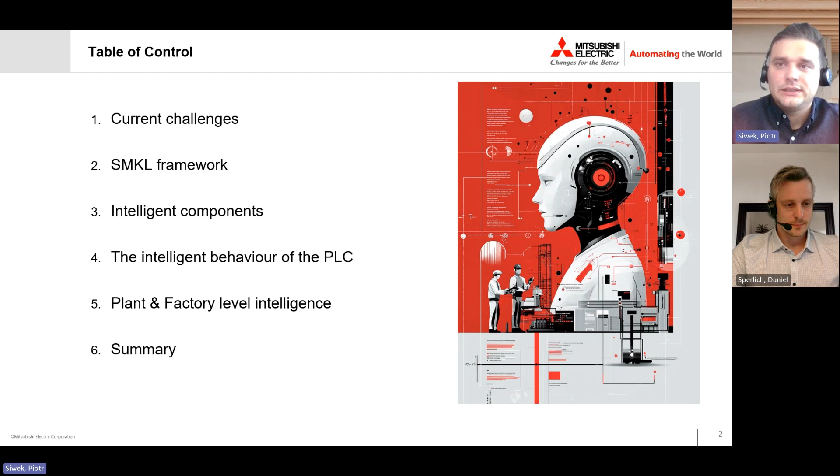So that is what we are going to talk about today. So very shortly about the current challenges, the ones that we will be talking about and trying to address. I think that one of the very important items is succession of skills, as we call it.

And the point is that due to the aging society, our staff, our skilled workers and engineers are getting older, and sometimes we don't have this quick and efficient way of replacing them. So we are left with a skill gap, and this skill gap is very difficult for companies to address.

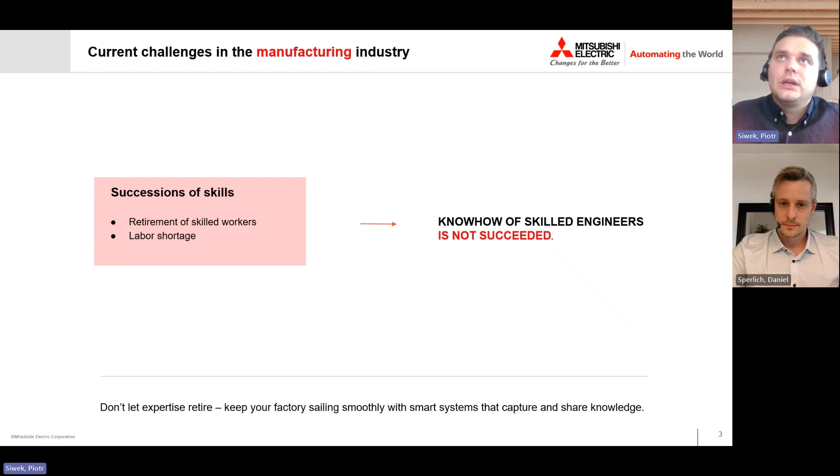Then obviously improvements of productivity and quality are always the issue. This is always the topic that is relevant for manufacturing companies, because we experience a lot of defects in our production. We expect quality problems, failure of equipment, and nothing can be done to avoid them completely.

But there are strategies to solve such issues, either ahead of time or very efficiently once they happen. And here we will also propose a couple of strategies.

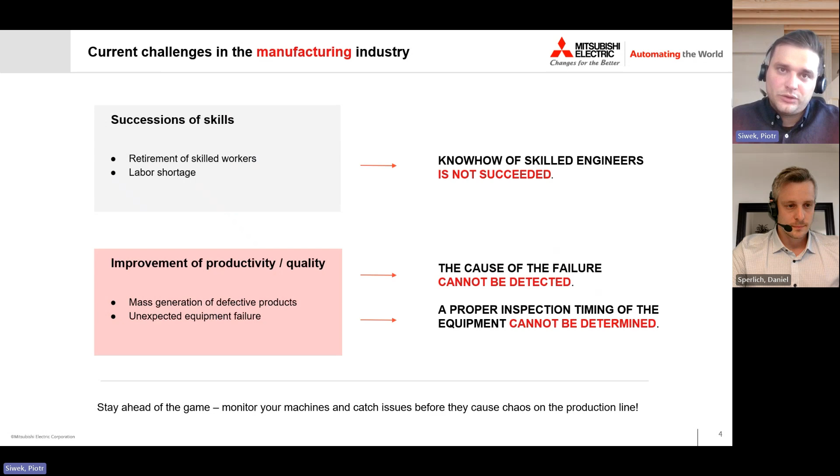And finally, responding to market changes. I think that the mass production that has become quite successful in recent decades is going away a little bit. These days we are talking more about high mix and low volume production, where people are expecting products to be personalized, and this affects manufacturing sites greatly.

Just to mention the new European Union directive, where all the caps on bottles have to stay fixed - it's a very small feature, let's say, but it created tremendous costs for production companies. So those things, unfortunately, create a situation where manufacturing companies are left with many problems.

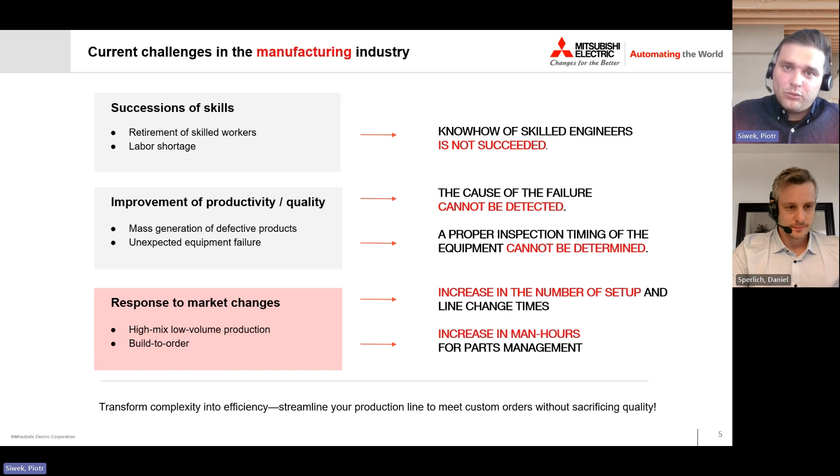A lot of them are very modern day problems, but they are affecting production sites greatly, so we will be talking about solving them. And I think to summarize this in one sentence, the idea is to improve by using data from the production site.

I think this is clear today, that productivity gains are shifting from the factory floor and the mechanics of the machines to the perfect use of data. And I think this is not surprising - this has become a main principle of Industry 4.0 already many years ago. But I believe this is still valid, that data is the new source of competitive advantage.

So we will be talking about this data, and we will be talking about using this data in many different ways - from analyzing how humans are moving and how they assemble equipment in more manual processes. We will be talking about how you can use data from the actual production, from the actual product. And also we will be talking about the assets - the machines, the type of data they are giving you, and what you can get from that.

And finally, all of this - we are not just getting the data, we need to analyze it and diagnose the problems. And we will show you the way, by intelligent systems, intelligent control systems that can help you do that easier than it was possible before.

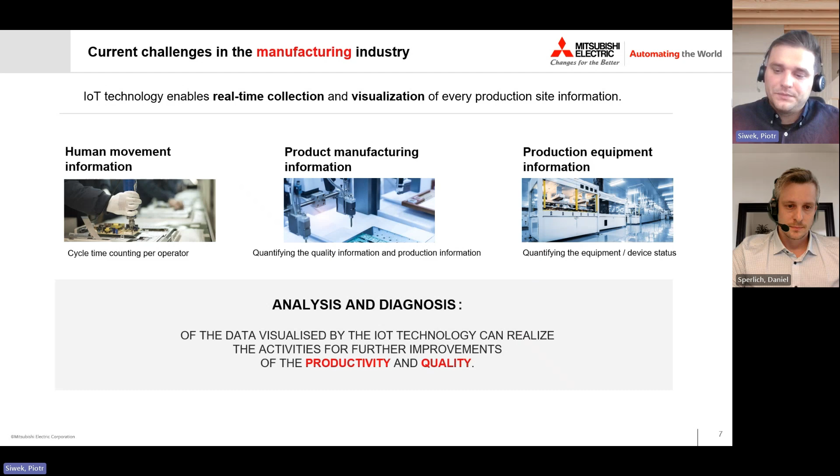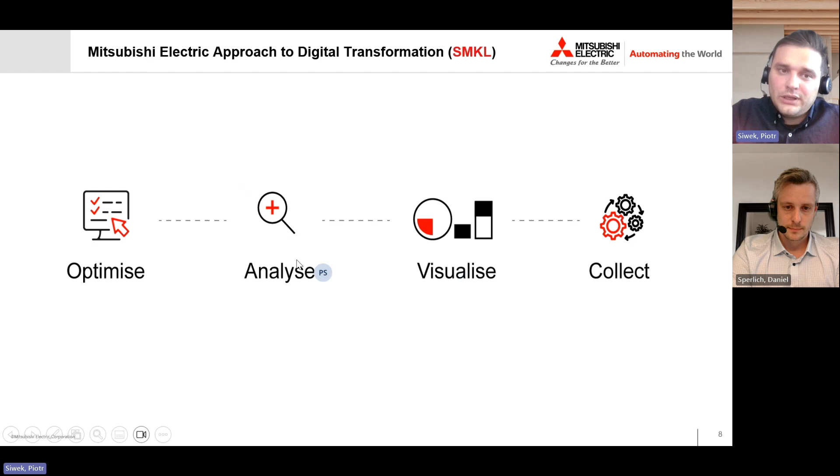So I mentioned about the framework, and the framework itself, SMKL, is quite simple because it gives you the idea how to use the data and how to classify where you are in your data utilization. So generally, it goes from collecting through visualization to analysis of the data up to the optimization of the production process, for example. So this is essentially the idea.

And the SMKL is like this matrix where you have just two axes, and basically every problem in your company, every problem of a manufacturing site, you can position it somewhere on how advanced you are in using the data, and how advanced you are in specifying the size of the sample, let's say.

So are we talking about single machines that you are able to monitor, or are we talking about the whole factory floor? This depends on your management level, we call it, but obviously it doesn't matter where you are, because you can always move a little bit forward, and it is very important to understand the current position. This SMKL is the tool to help you make sure where you are and move forward from it.

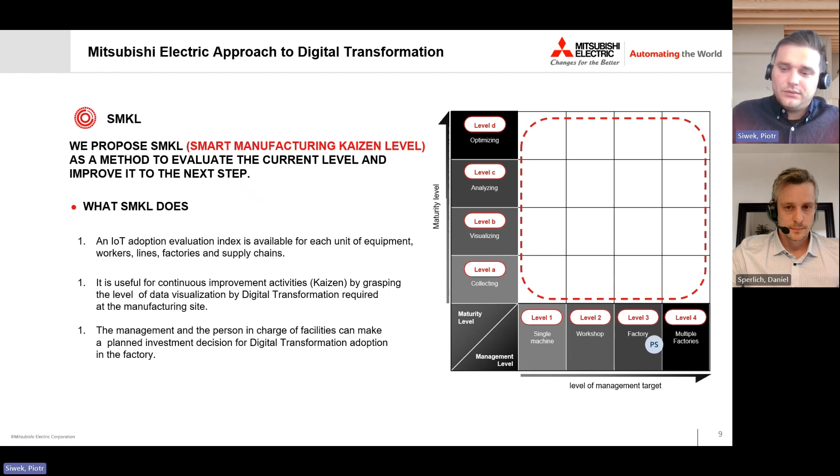And we will show you ways of moving forward from virtually any level, so it doesn't matter where you are. You're using the strategies that we'll present to move to a more advanced position. And finally, the principle we want to make today is that the intelligent control system, however it sounds, is not the same as a programmable logic controller. The PLCs are a part of the whole equation, but this is not the same.

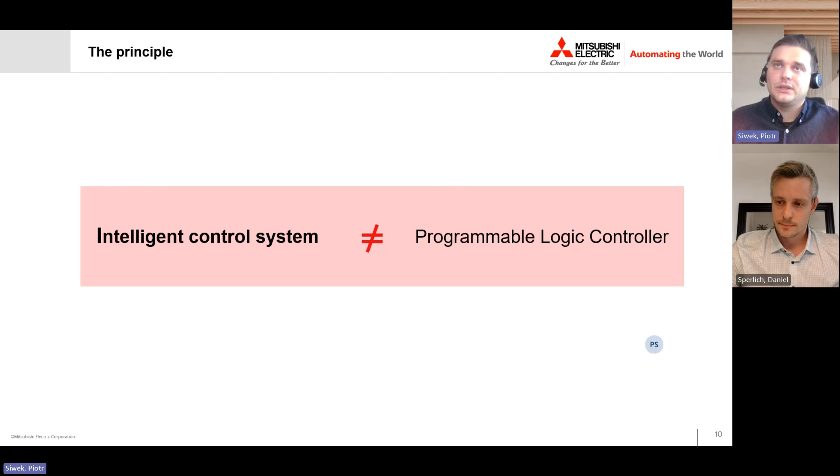And we will be showing you also the data utilization strategies that are not necessarily used with the PLC itself. So we spoke about those different levels, different strategies depending on how advanced you are or can be in using the data. So you have this simple view of the factory, where it can start from the component level up to the cloud when it comes to using the data. And we will start with the first level, going through each stage up to the whole plant that you can also analyze. So Daniel, would you take over?

Yes, thank you very much, Piotr, and thank you also for joining. As Piotr said as well, if you look at this picture, you can see all sorts of levels, but you don't have to start right away at a very advanced level. Many times it's already good to have a very quick result and ROI if you start very small and then grow in steps.

And that's why Mitsubishi Electric also has lots of solutions in each component that we already have. I would like to introduce here on the next few slides a few solutions that we have in our servo systems, in our inverters, in our robots that make your life already easier. They're basically already integrated, so nothing more that you have to get. And the topics that we address are very specific to each product, to the tasks they have to do, or typical tasks, let's say. So there's maintenance, predictive maintenance, or also improving product quality or takt time reduction.

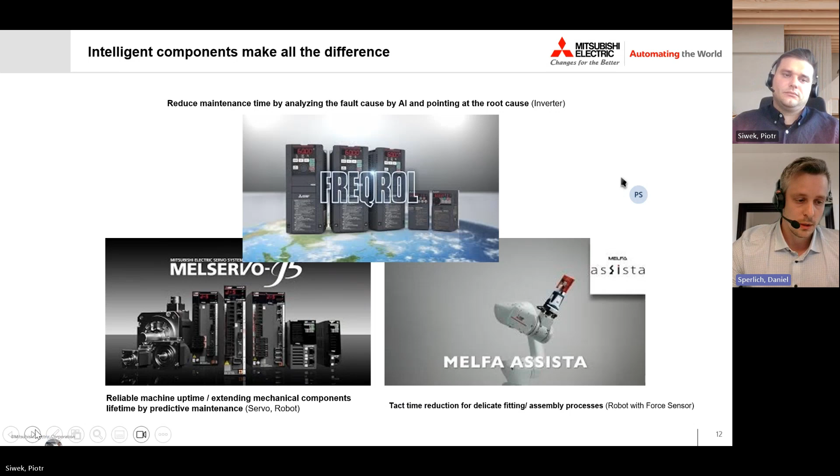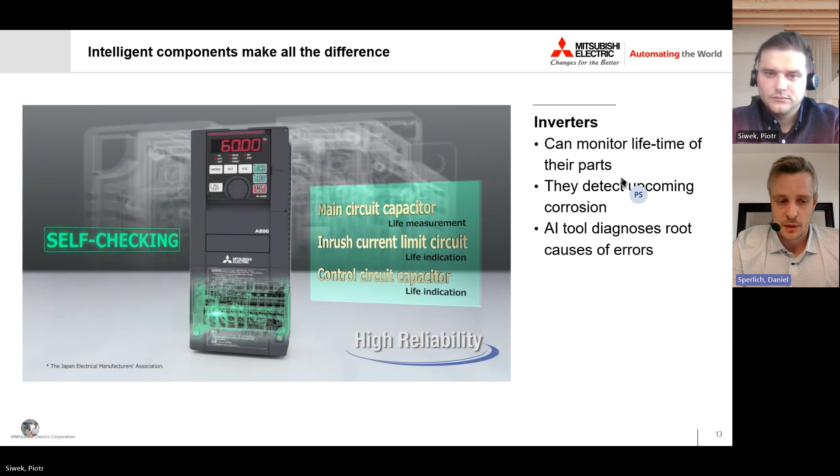And I would like to go through them one by one, starting with the inverter. Over here, you can see that our inverters already know all the details about the internal components, from capacitors, circuits, or even there's a new corrosion detection inside that will indicate if you are in a harsh environment, when the PCB is close to failure, that you should replace the inverter or the internal components. So really cool integrated functions already.

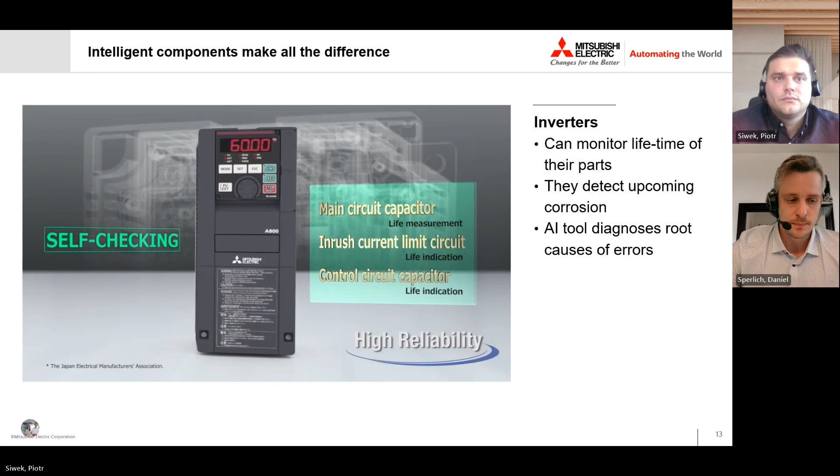And of course, there's AI in almost all of our components already inside. So the AI that is specific for this inverter is identifying the cause of the error. Every inverter has some errors, maybe for example some overload or other troubles, and the AI is internally detecting what happened before, what happened after the error, and pinpointing the cause that resulted in that error. So it's saving you lots of time for troubleshooting so that you can get your machine back and running very quickly. That is a very small and quick example of the inverters.

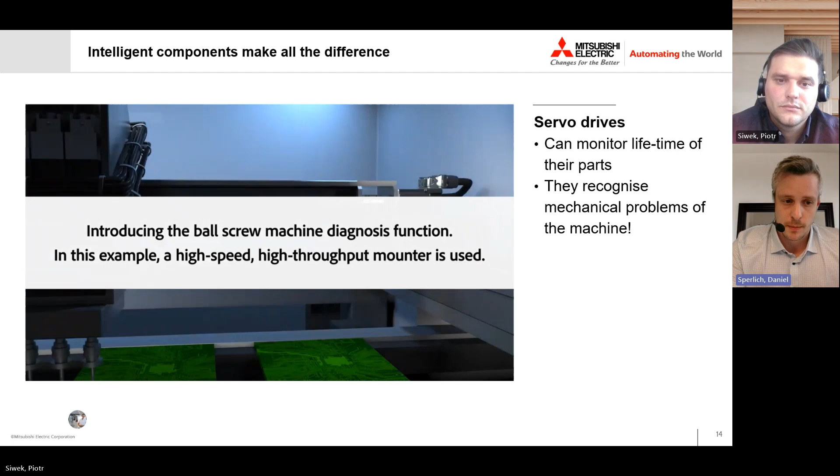If we look at the servo drives, here it is a little bit more focused on the mechanics. Typically, servo drives are connected to belts, gears, ball screws. And by learning the behavior of the mechanics, the AI can then detect what is the good situation, what is the good production cycle, and when does it slowly and gradually shift into a maintenance or breakdown scenario?

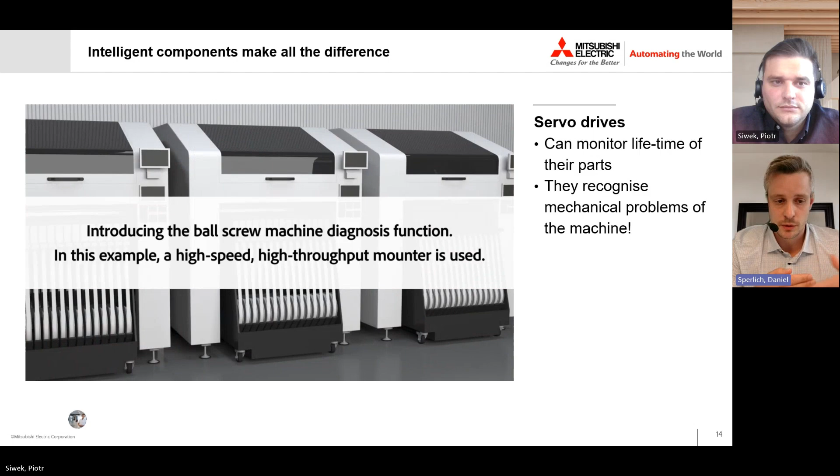So what does it mean? For example, if the ball screw is not properly maintained, maybe there's some oil missing or whatnot, slowly over time there could be some vibrations happening. There could be increased torque because it's harder and harder to move the ball screw. All that can indicate a breakdown in the future, so we can warn you ahead of time.

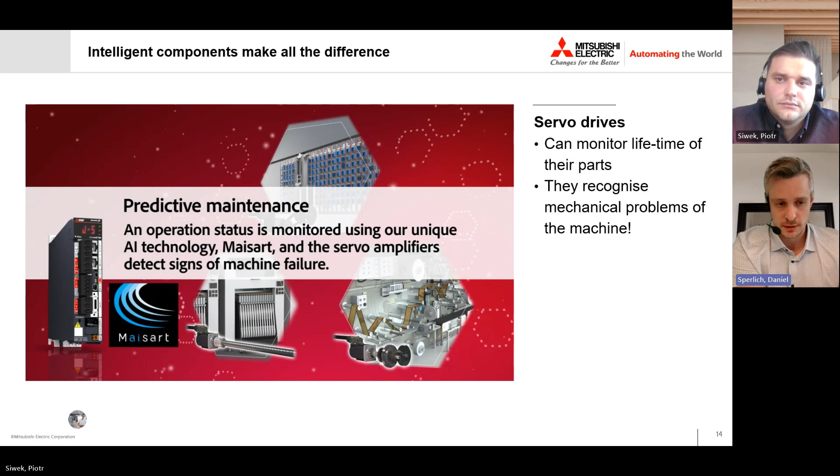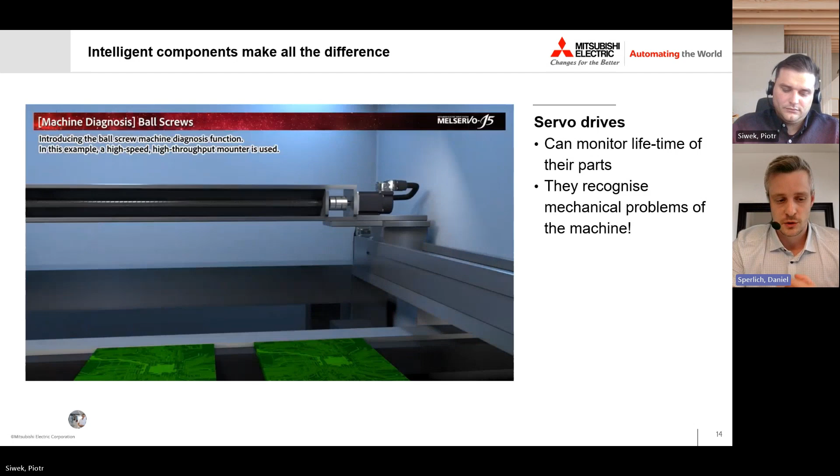And exactly the same thing you can also expect for belts, for example with the belt tension - there is AI technology also for that - and for gearing when the backlash is increasing. So at the end, you will have a very sophisticated predictive maintenance functionality already in the servo system that comes right with it. You just have to activate it, teach basically the normal situation of your machine after you maintain it, and from there on you get automatically the warning from the servo system that there's maintenance having to be done very soon.

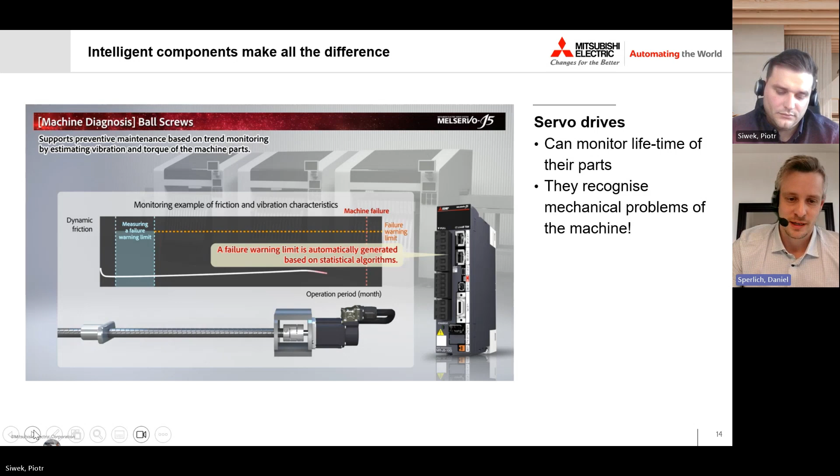It's a really cool function here, and I think you cannot be any closer to the mechanics than the servo system over there. And the last part that I want to introduce are the intelligent robots.

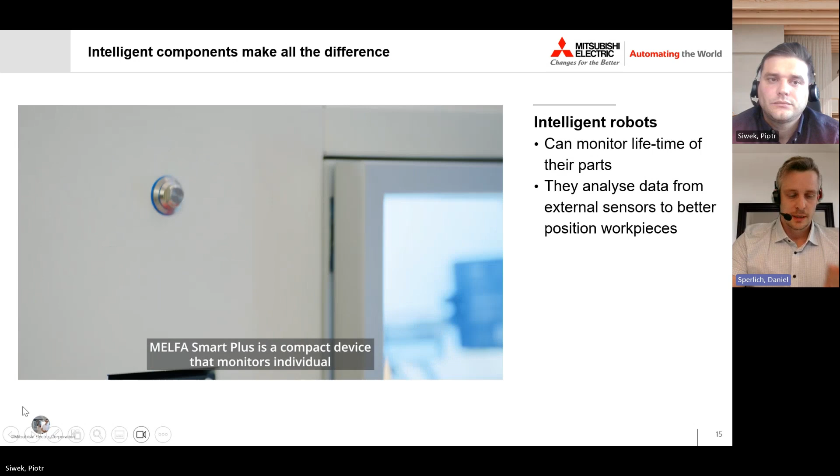So you can attach a Smart Plus card that allows you then also to utilize additional features. Just imagine the robot is nothing else but a hand, but with a hand, if you imagine this kid's toy where you have many different shaped holes, and the kid is trying to put the circle into the circle - it's not putting it exactly in, but wiggles around a little bit and then fits it. Roughly the same you can expect then also from the AI, from the Smart Plus card.

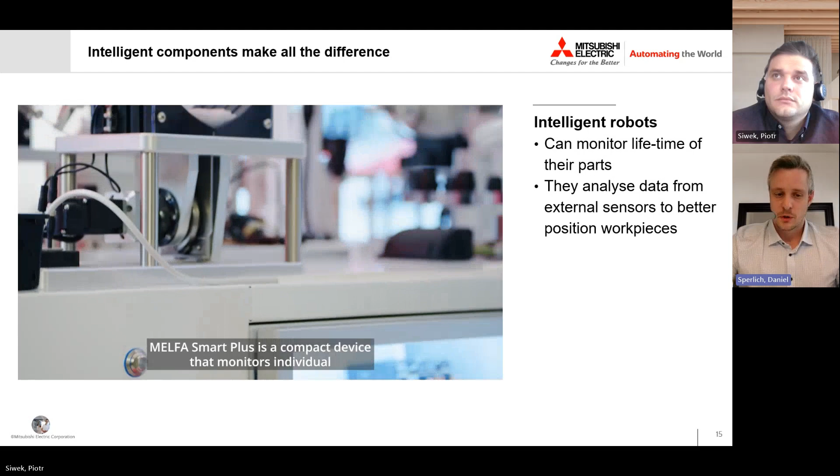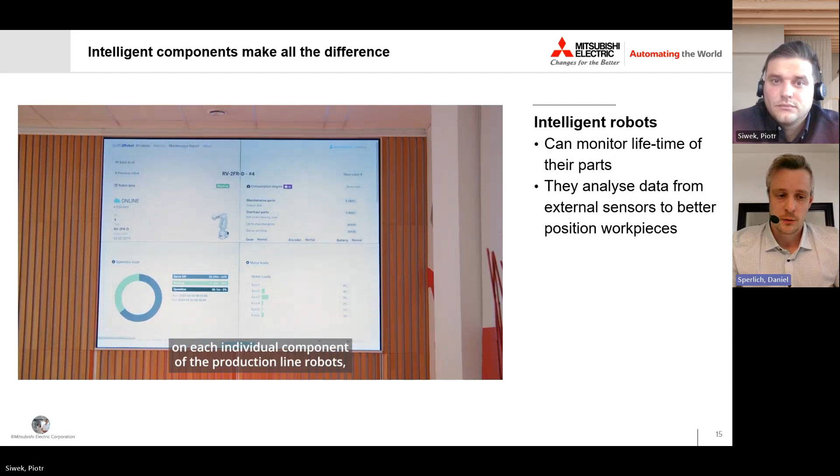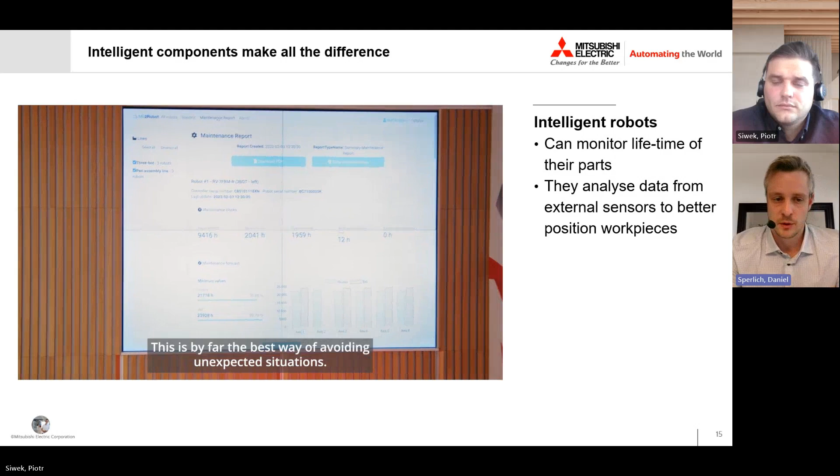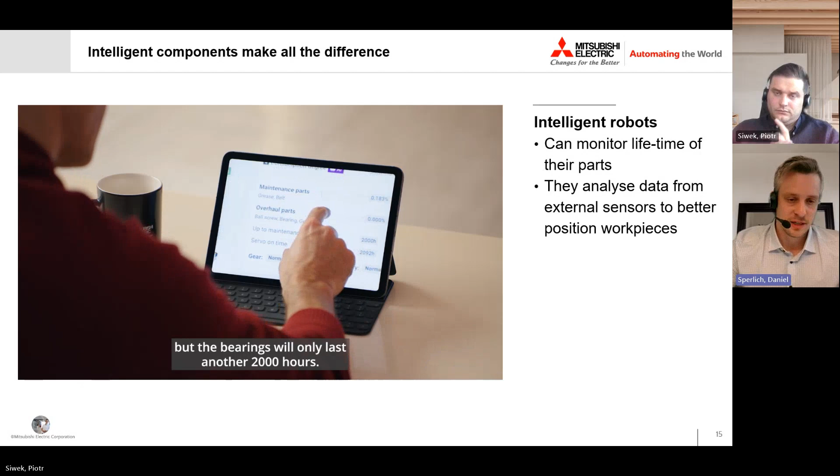So even if there are some tolerances, or it's very hard - not fragile, but difficult - to fit some product inside, you can do it without breaking it, because now the robot can feel, literally. And of course all the internal components you have there as well - maybe belts, tensions, gears, and so on - are observed all the time, and you can get automated warnings for maintenance. So already, as I said before, 3 cool solutions with AI inside that you can start already from the component level, meaning virtually no extra investment and quick ROI.

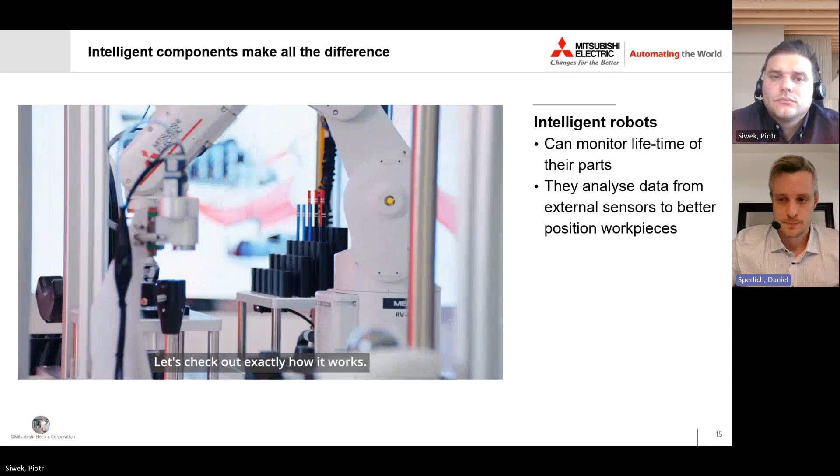Going from the component level to the machine level, getting basically one step ahead. Here I always have to smile a little bit - everybody who knows Back to the Future with Doc Brown, traveling back in time in the first version of Back to the Future - that's exactly also what helps you when there's some trouble with your machine.

Just imagine this - I will show it in a video later, but let me explain a little bit. If you have trouble with your quality or your machine is stopped, you always come to the machine after it already happened, so you're sometimes guessing a lot, like what happened. You have to reproduce the error and so on. So the idea of the system recorder here is that you can travel back in time, see exactly what happened, and take countermeasures accordingly, which then, if you eliminate the cause - for example for a product quality drop or a machine breakdown...

...in the future your machine has a better OEE, your quality is better, and overall there's improvement of your machine.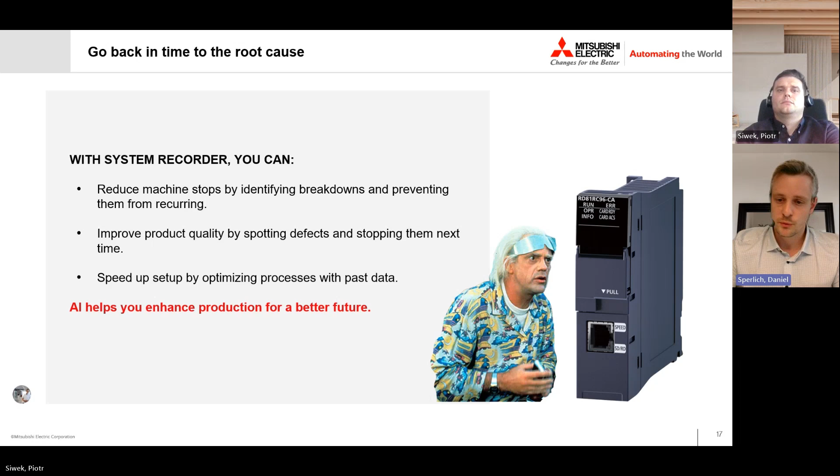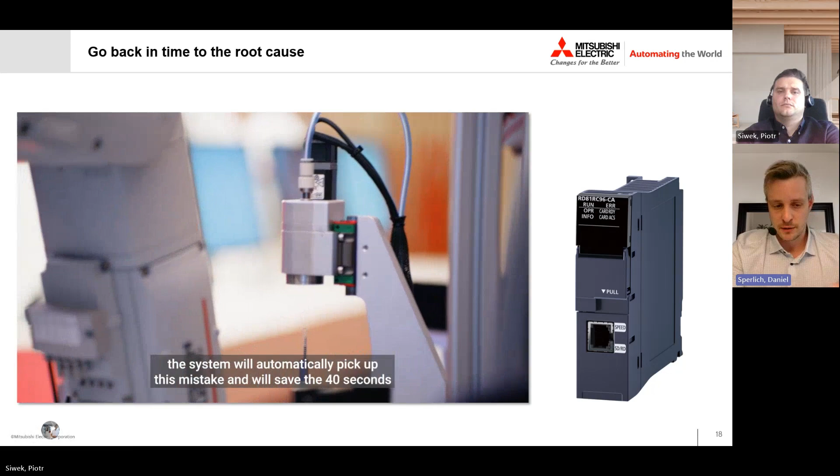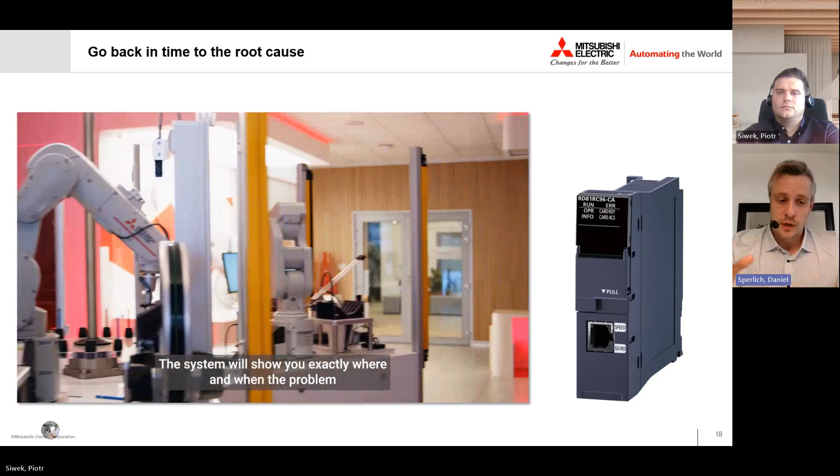So this is actually a very nice example over here, where you can see that during the assembly of a pen, the cap was not correctly mounted on it, or not correctly screwed, and there was some error basically. It was all captured by camera - this is what I didn't mention before. Of course, with a camera image as well, or video image, if you go back in time you have a view of the situation that happened, but you also have all the data that supports it, and everything is synchronized.

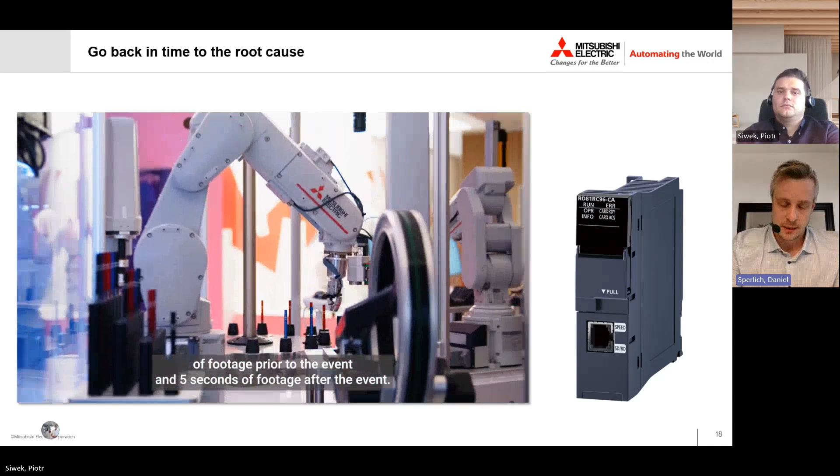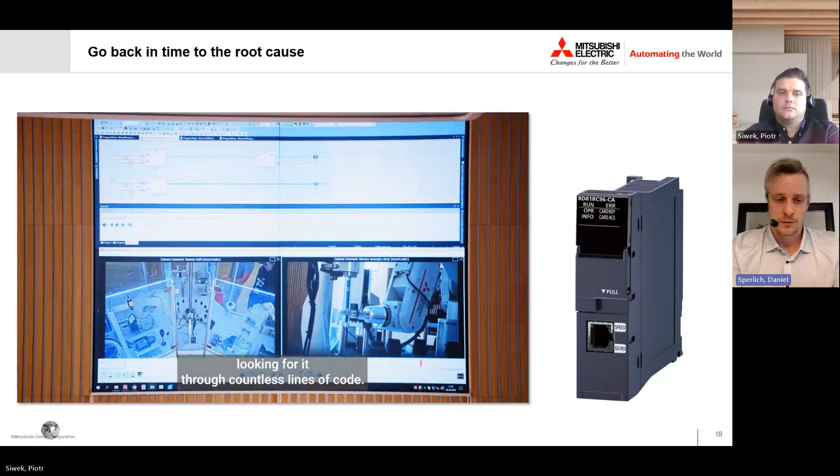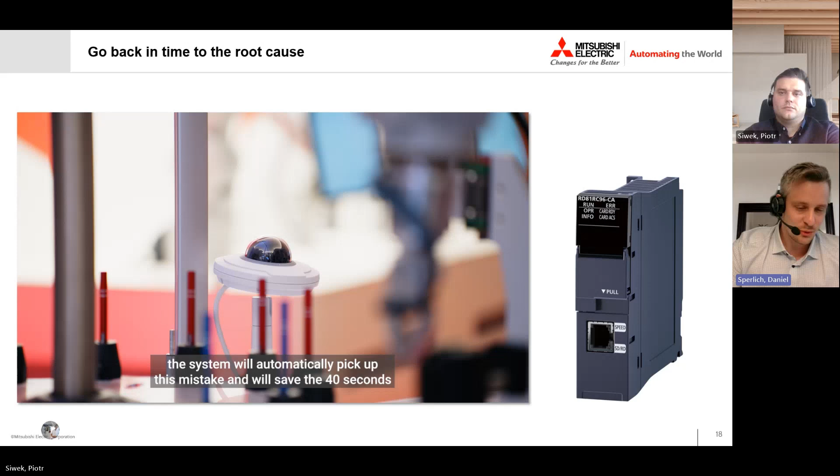So even if you arrive at the machine after it stopped, you can go back and you have exactly the same tools as if you were standing in front of the machine exactly at the point in time where it happened. You could see it very briefly on the monitor at the right side - the moment it jiggled and the cap fell off. It was very short, but I think this is a really cool functionality of the system recorder.

But okay, so this was about going back in time, but I think also maybe going again to this movie topic. There's also Back to the Future, right? So also you want to go in the future, trying to avoid what could happen or what will eventually happen if you don't do anything in the future.

And I took this small example here from Formula One, because this is actually also an example where this solution that I introduce here is being used. So you can imagine in a Formula One car, there's so many sensors, and the sensor data is transferred all the time to the control desk. And probably if you're watching Formula One, sometimes you hear that the crew from some team says, please stop the car, because they saw something was wrong with the engine and they didn't want the engine to blow up.

Okay, so at the end, what the solution does is it creates a possibility to make correlations of all your production data. So you can see here on the left side, you have item B and item A. This could be temperature, pressure, for example. And the correlation of both is then displayed over here.

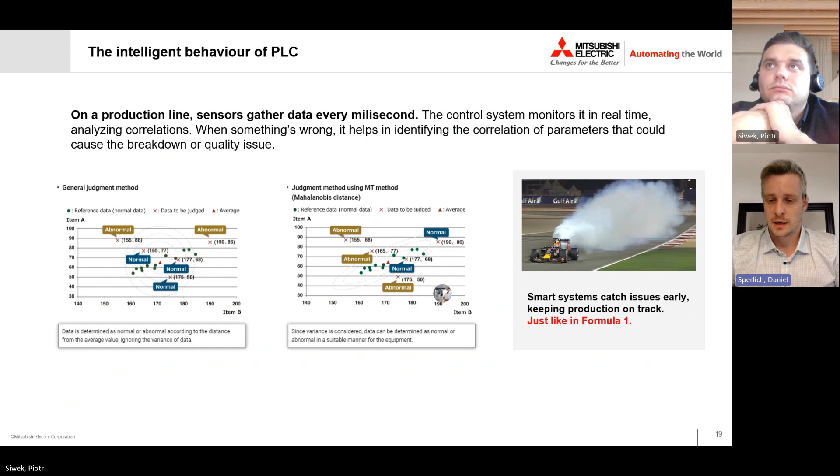And of course, not only can you think about it for productivity or production quality, but also for predictive maintenance, because here it's exactly the same. The principle is that for some breakdown scenario, normally it goes very slowly, for example temperature increases, vibration starts, then rapid increase. And this will also be detected here. And you can not only, as we saw before with the servo systems, go for belts and gears and ball screws, but also for all the other mechanics inside of your machine.

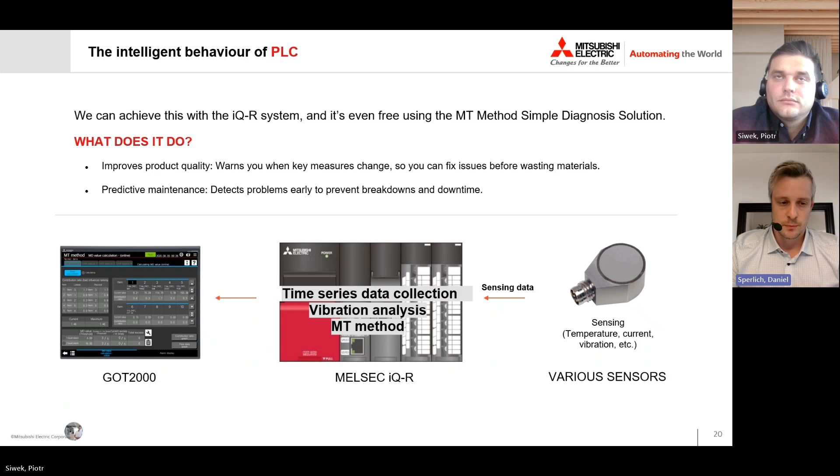And the next thing, I think actually this is a really cool new feature of our engineering software. It was just released, I think, a few months ago. So let me explain why I think this is so cool.

Again, this is helping you when the machine, for example, stopped or you had some bad quality. Let's say you recorded everything already, so you still have to search for the right moment. And let's say you have a huge code, really, really long. You have to go through your code and then see where, for example, the sensor didn't turn on, or maybe some value shifted in the wrong direction. And I think everybody would have wished already for a long time that you just click a button and jump directly to this area where, for example, the sensor didn't turn on.

And everything can be done here with this new functionality in our engineering software. So I quickly just explain it. You record a typical cycle of a good product, this will be taken as a good example. When then your production is stopping or you have bad quality, the AI will check both and exactly show you in the program where, for example, the sensor didn't turn on. And I think this is really cool and helps reduce this troubleshooting time by quite a lot.

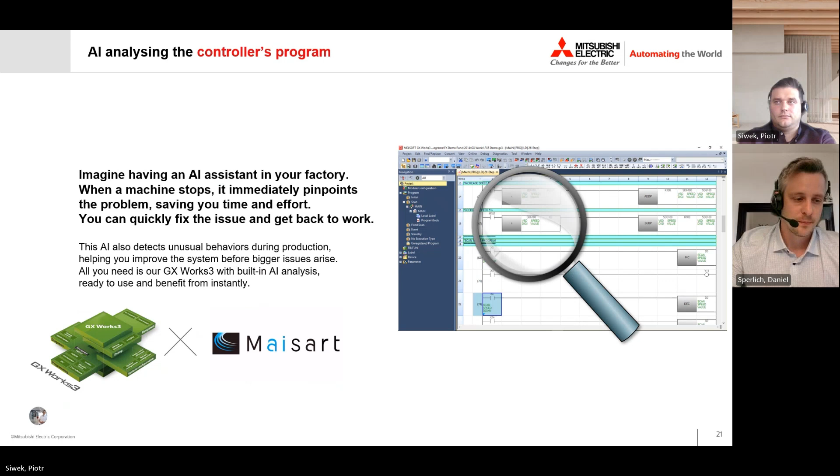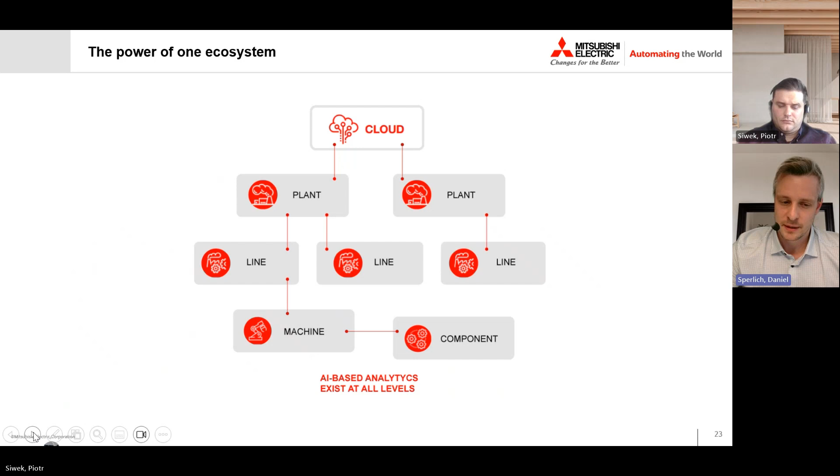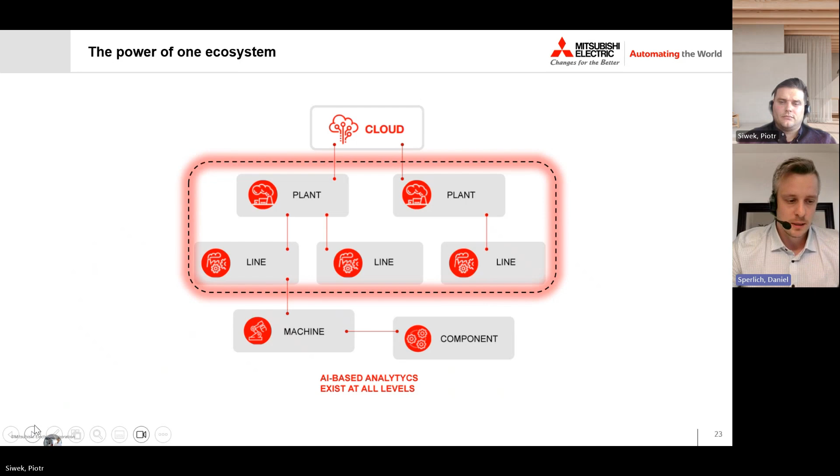All right, I think it's time to move one step further. So we went to the components first, the machines, and now we are moving more to the line and plant level. This is basically where you want to collect much more data, not only from one machine, but from many machines, maybe from your whole shop floor. So this is a much more advanced task that is required here.

And normally, you are probably employing many people who are there for quality, who are always checking each day all the quality levels. Of course, you also have, as we heard before, this is one of the troubles: if the experienced engineers go to pension, how do you then educate the new ones, or how do you transfer this knowledge? So there are trainings and so on and so forth. But of course, you also have quality staff or somebody who's analyzing the data in real time, and then also saying, okay, we have to shift maintenance here and there. But it's all still using lots of human interaction, so there's still somebody who is required to do these tasks.

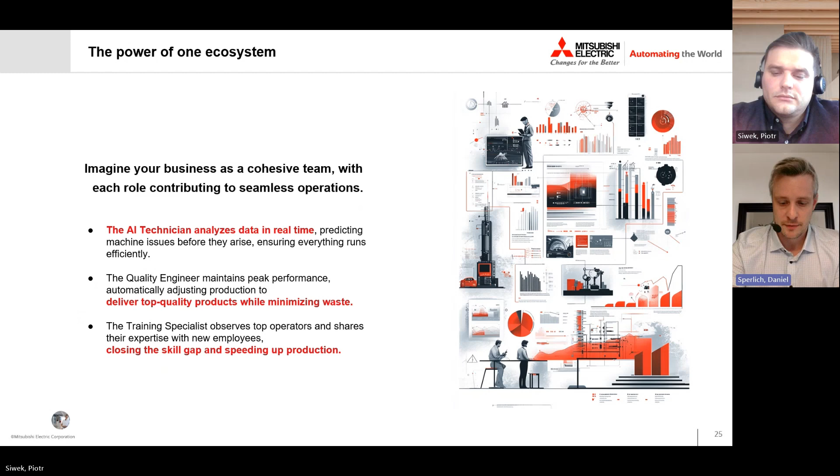But at the end, I think we are at a time where this can all be made with AI, and we have a tool for that as well. It's called MaiLab. The main focus of this tool was to make it as simple as possible to use, so that everybody can basically be a data analyst without even being a data analyst.

So you're just starting the software. It's very easy, start it in your browser. You're selecting with a few clicks what is your intention, what do you want to achieve. So do you want to do quality control, energy consumption reduction, do you want to do predictive maintenance? And you just load it all with the data that you require. Then all the analysis is done by itself. You're checking it, and you even can do the feedback loop here, taking some action.

And I think this is really the great differentiator here, that it's very easy to use. You can define your target, what you want to achieve, and simply by a few clicks that everybody can do, you can start creating your first own AI.

And the feedback loop here, going back and making some reaction, I think that's what really elevates your machines, your line, your shop floor, because the AI already knows that, for example, in terms of quality control, your product is slowly shifting away from a good product, slowly shifting to a bad product. So if you know already the countermeasure, it can be done automatically. Then the AI analyzes it again and says, okay, it's back to normal condition. So it ensures your quality, for example, to be very, very stable, and gives you also the competitive advantage here.

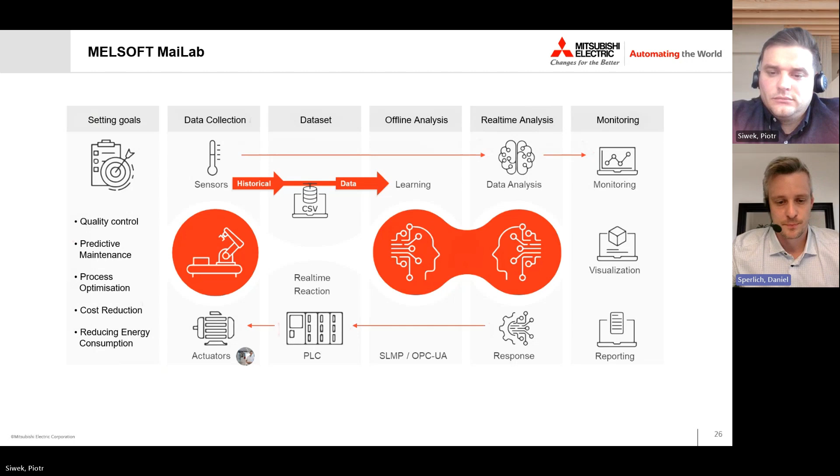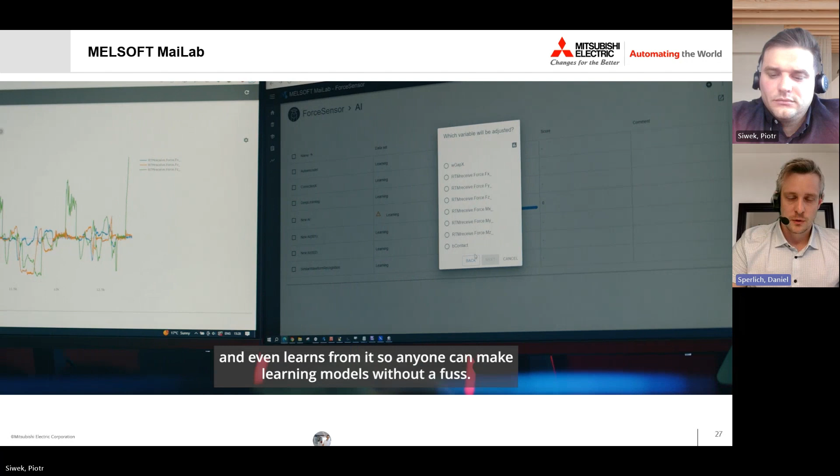And in this video, you see a little bit of the interface already. I think it's very modern, all starting in your browser. So you can either do it on your smartphone, on your laptop, wherever it is. You can collect all the data, create your AI. And as I said before, you don't have to be a scientist for it, so it can be anybody. It's really cool.

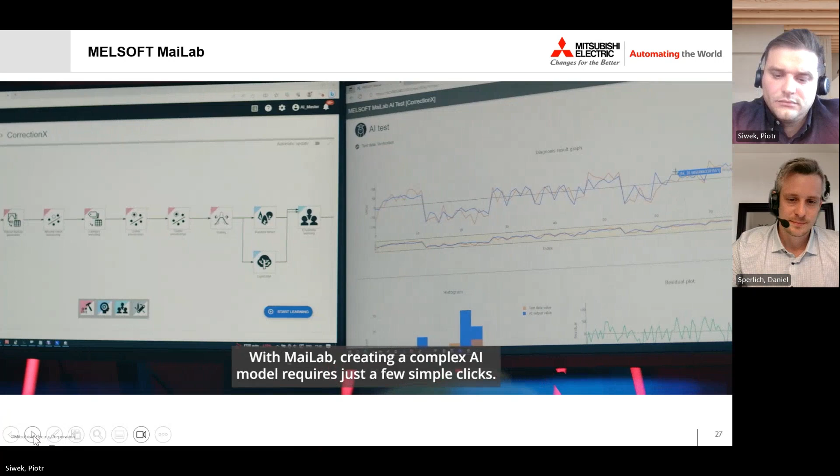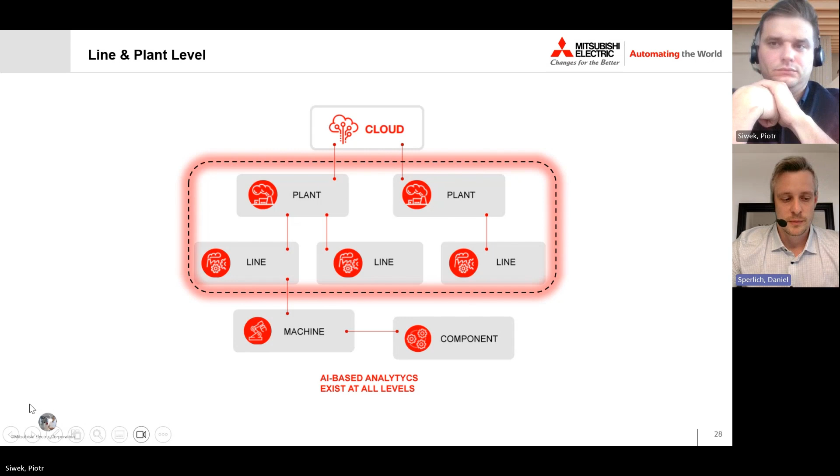And staying on the same level here as well. Of course, now we were talking about many solutions that are for a specific topic, but at the end also, you want your staff to be informed to take some action. So in terms of, for example, the MaiLab that I mentioned before, it can do automatic actions, but for example, for maintenance topics, you have to, of course, inform your maintenance staff. If there's some sudden change, you have to stop the machine very soon, or replan, or reschedule the maintenance.

So of course, there is also the messenger required that visualizes everything happening in your machine, your line, your shop floor basically, so that you know what's going on, you can counteract, and especially that it's available also on smart devices, like your smartphone, for example. And of course, here also in Genesis, in Iconics, there's many different AI functionalities also for graphs and so on and so forth. So a very, very competitive SCADA system.

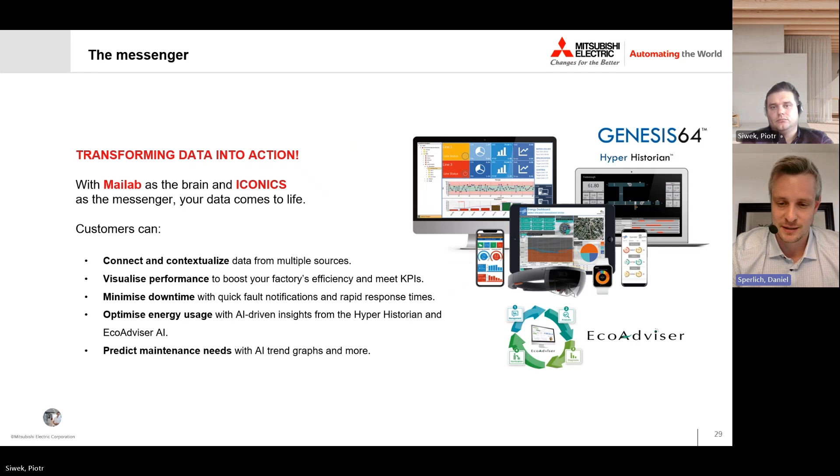And last but not least, I think energy is something that drives almost everybody at the moment with the high energy costs. And here with the EcoAdviser, we have a great solution. I just brought two examples from our own factory.

That was a task given also for our factory in Fukuyama, Japan, where energy had to be saved. Using the EcoAdviser, we saw that with very low effort, for the press machine, 5,000 euros, or for a furnace, 8,000 euros could be saved per year, while the license is quite cheap. ROI could be achieved already in a few months. So that was really nice.

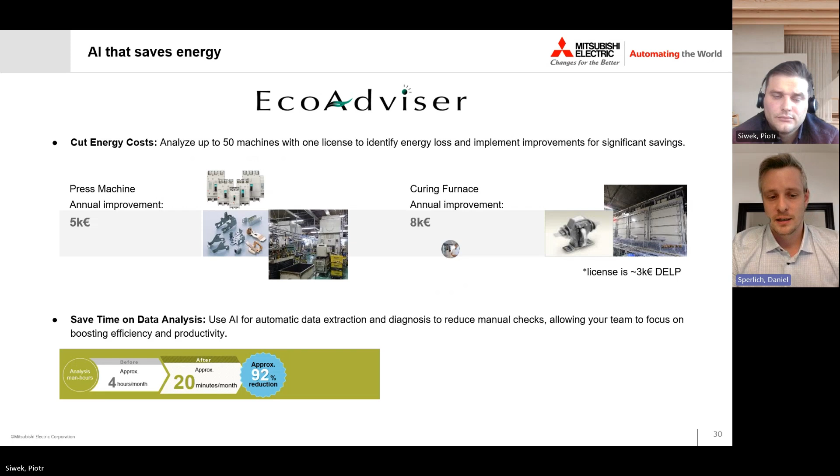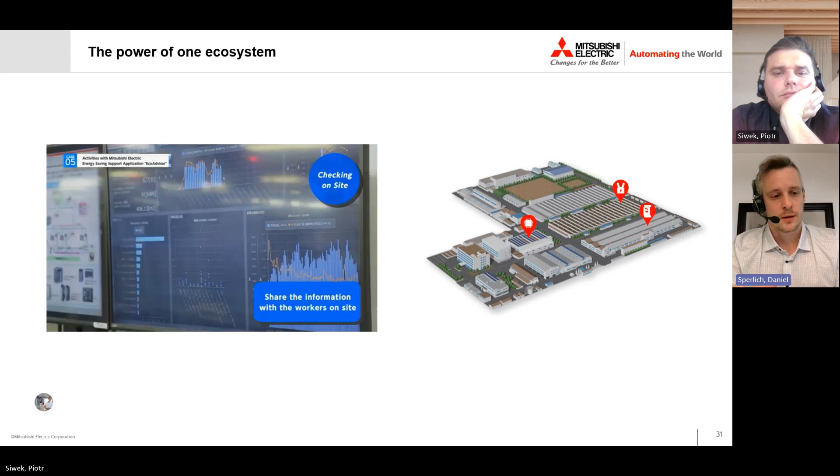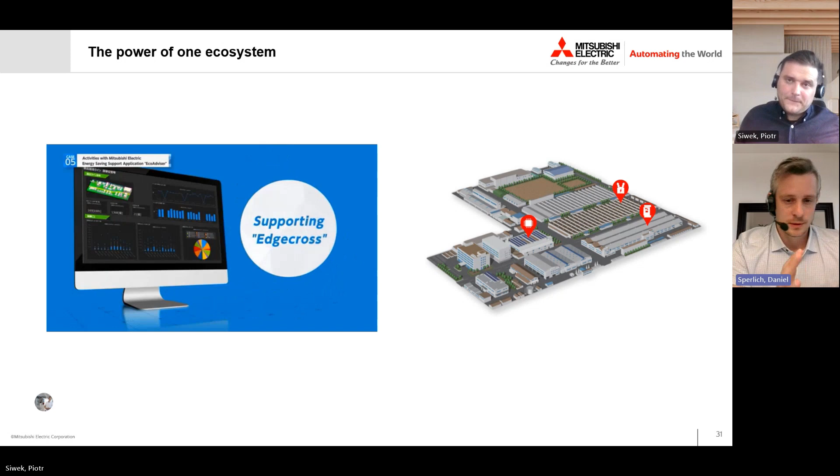Explaining a little bit about the EcoAdviser, what does it really do? It's collecting all the energy data, but also all the production data, and combining them. With AI, it's pinpointing directly at the situations where you could save some energy. Therefore you can improve the program, the process, automatically without having the need to manually analyze all the data, then manually display it and so on. So everything is done by AI as well, helping you in a very short time to find situations where you can save energy.

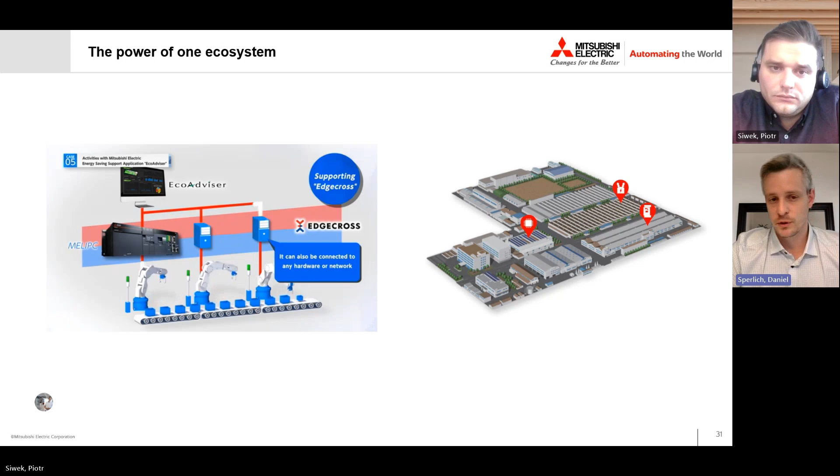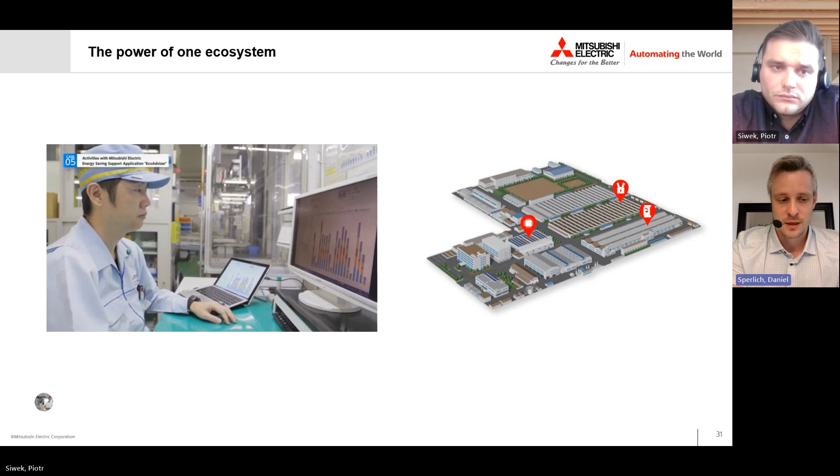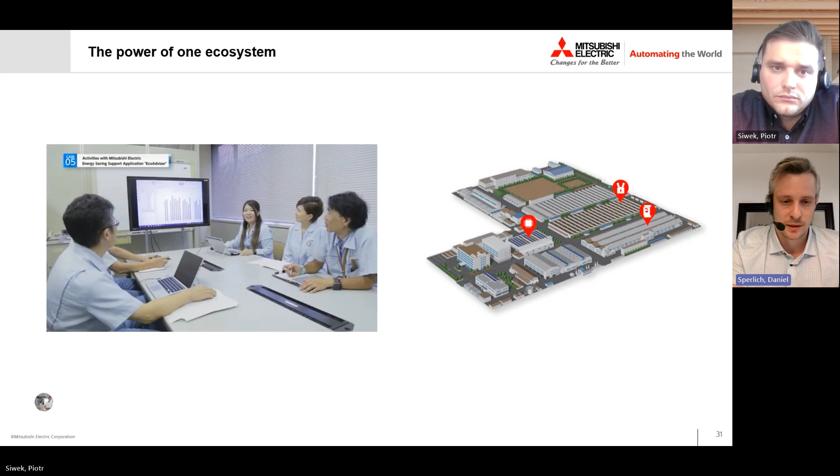And I think this is also a very good point for your machines at the end, to advertise having a very low energy consumption machine. I think this is one of the points I hear advertised at fairs as well. Here we have a solution where you can optimize it automatically. And the good thing is the EcoAdviser is also very open, together with the ICONICS solution, with the Genesis solution, that can collect data from virtually any data source. So it's a very open solution here as well.

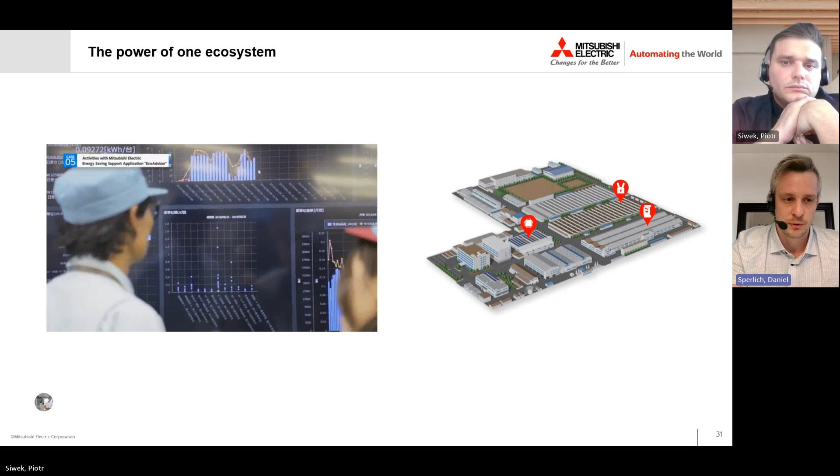We are wrapping up this seminar, and what I want to say at the end, I think that today we see a lot of investments where companies invest in these high-level data platforms that allow manufacturing companies to analyze the data. This is what Iconics can do, obviously, but it is just the tip of the iceberg. So I think that the ability to start smaller is a very, very powerful feature.

AI was mentioned many, many times today, but if the AI is given on a product level, that's a different story. Because on the product level, on the component level, you are getting very specific intelligence, specific to the current needs on that floor. And then slowly you can move upwards and implement more and more advanced data analytics solutions and strategies, because it's not only about the products, of course.